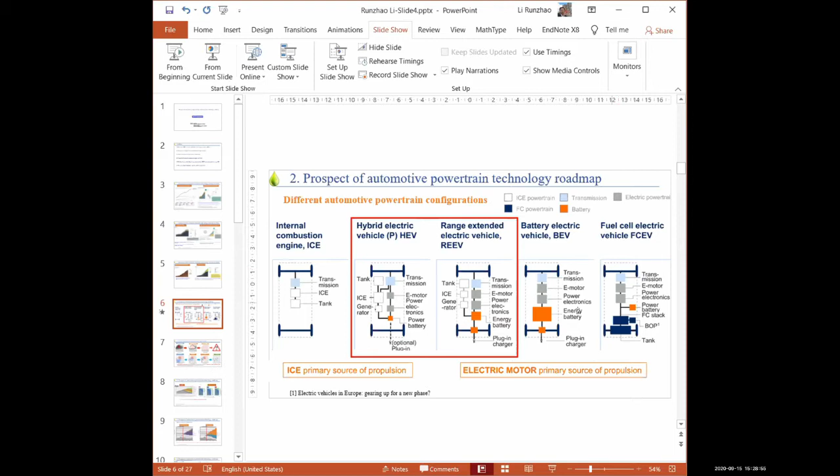Here we will discuss how hybrid technology and electric vehicles can provide a new development opportunity for the IC engine.

This is the traditional engine development procedure. But if we introduce the electric vehicle, especially the hybrid vehicle including the IC engine, it will provide a new opportunity for the IC engine to stay alive in the future. We will see that the IC engine will no longer work in the whole range. It just needs to work in this range.

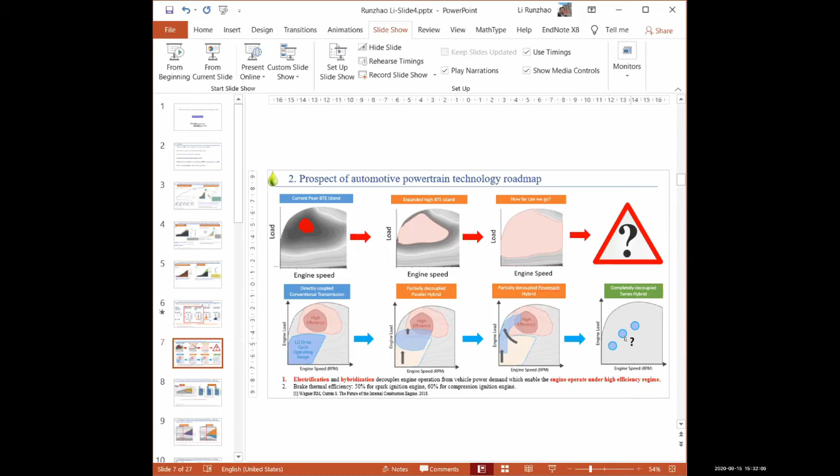Okay, this is the hybrid vehicle. We will see especially this one. This is the future. In the next 20 or 30 years, powertrain technologies like IC engines, hybrid vehicles, battery electric vehicles, or fuel cells will be diverse. The IC engine will no longer be the king of the vehicle.

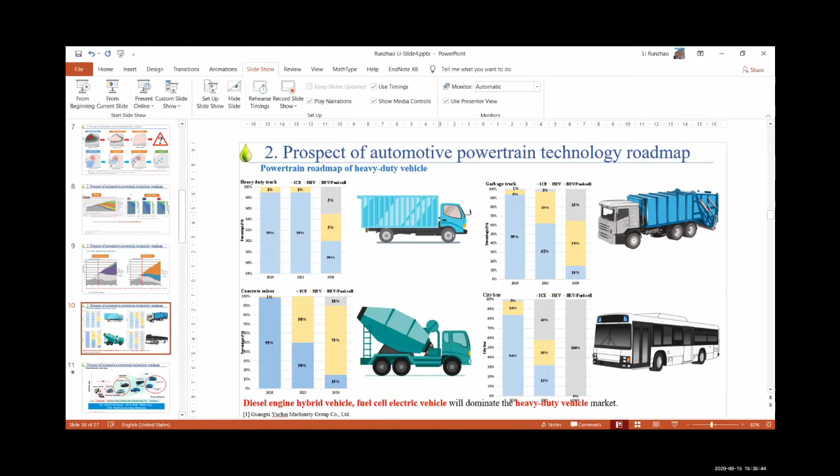Of course, for the mini vehicle, the battery electric vehicle can be used because it doesn't require a very long distance cruise. You just need to drive to the university and go back home. Therefore, the battery is enough.

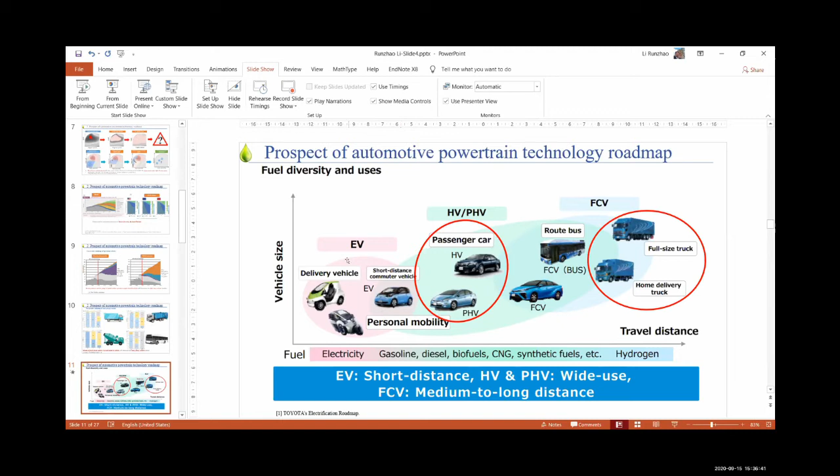Therefore, at least in my perspective, the hybrid vehicle or the plug-in hybrid vehicle will be dominant in the next 10 or 20 years, and it will also keep the IC engine alive.

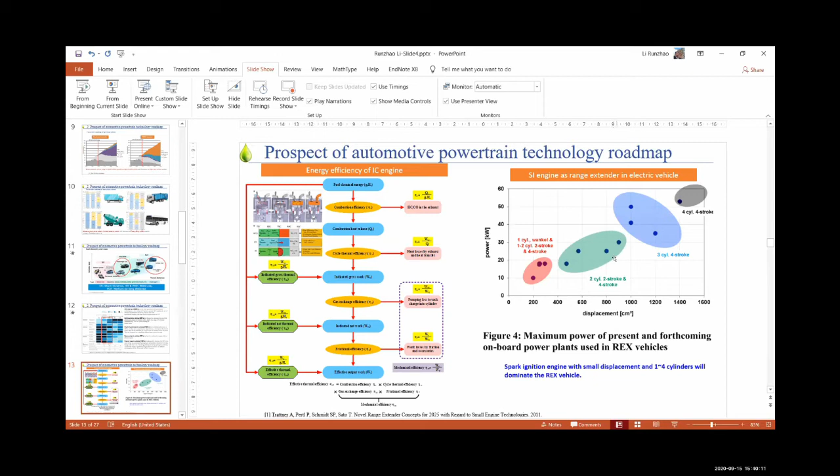We already know that, but it also uses some sustainable energy like wind energy and solar energy to produce electricity to electrolyze water to produce hydrogen. This is the reason why I say hydrogen is very, very expensive.

This hydrogen, unlike what Martin said, is in this case not used in the IC engine. It is used in the fuel cell, because in Shell's plan, the best usage of hydrogen is not in the IC engine, but to supply the energy source of the fuel cell.

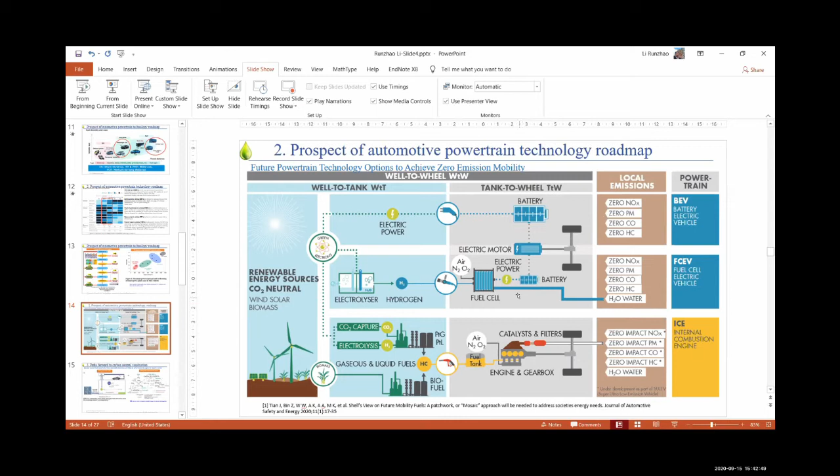Yes, but we can see here in this whole picture of the tank-to-wheel view, Shell still incorporates the IC engine into the powertrain technology. That means Shell also favors that the hybrid vehicle will dominate in the future.

For example, I already mentioned that in China, even though they transfer to the electric vehicle using the fuel cell or the battery, since in China more than 70% of the energy mix is from coal, the majority of the electricity production is from coal. Therefore, the Chinese government still encourages carbon neutral fuels, where the net production of CO2 is zero.

We take e-fuel from renewable electricity as a case study. First, use sustainable energy to produce the electricity, to electrolyze the water, to produce the hydrogen. Then they capture the CO2, carbon dioxide, in the atmosphere, and then manufacture the syngas, and then use Fischer-Tropsch technology to produce the liquid fuel.

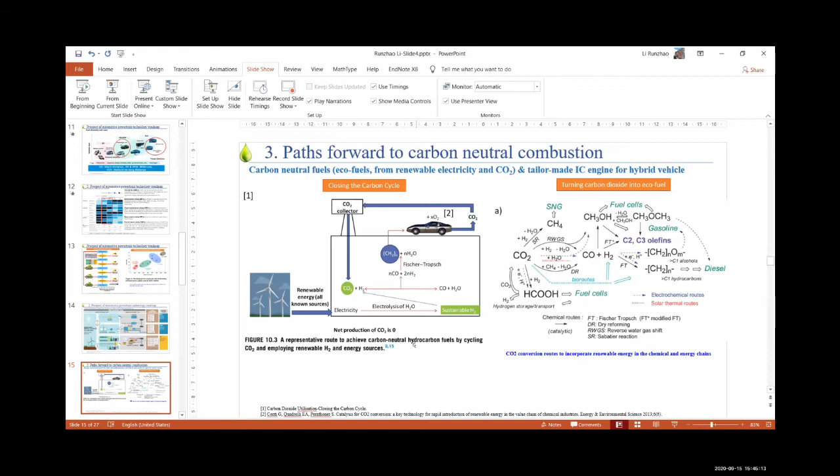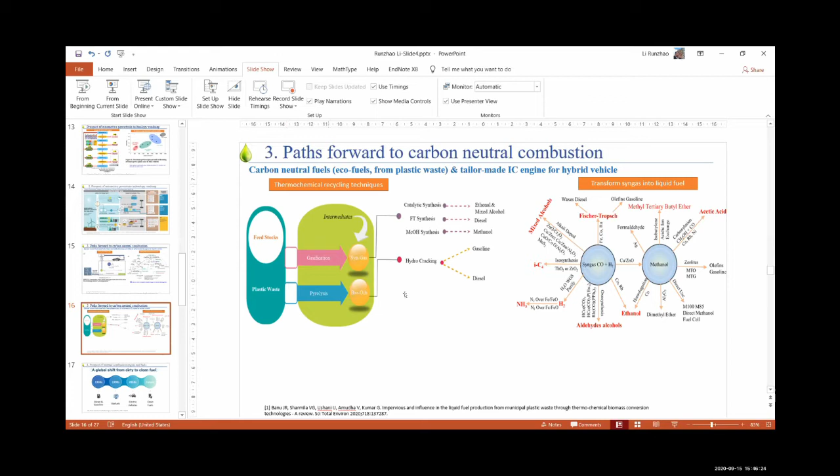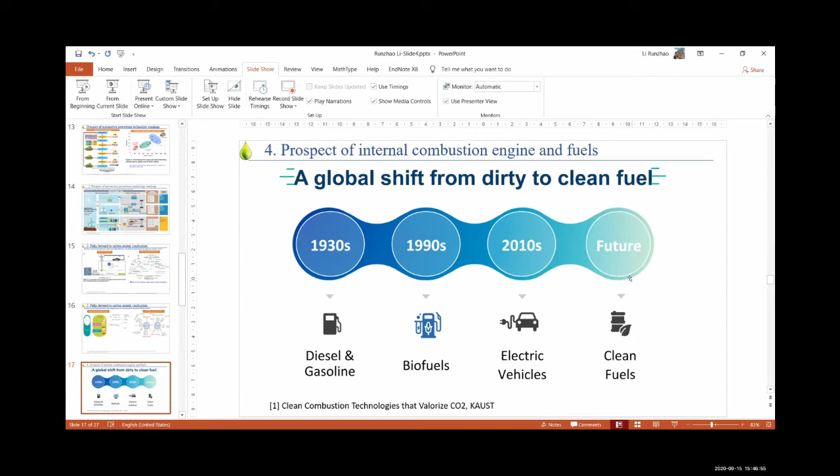This is the perspective of Saudi Aramco. It claims that the electric vehicle gained more attention in 2010, but in the future, clean fuels will play a more important role. Let's go a little bit further to see how this clean fuel will play its role.

First, we have an overview of the combustion modes of the IC engine. The first one is the gasoline engine, spark ignition combustion mode. The compression ignition mode is commonly used in the diesel engine.

Now, some new technology. The ideal is homogeneous charge compression ignition, but currently it is constrained to a very limited operating range; it cannot run in a wide range of operating conditions. Therefore, researchers developed many types of advanced combustion modes, like the reactivity controlled compression ignition combustion mode, which is shown here. Another is the gasoline compression ignition engine.

They use medium reactivity fuels, not in the spark ignition engine, but in the compression ignition engine. That type of fuel is a little bit like gasoline, but with a lower research octane number of 60 to 70. This technology doesn't need major modification of the engine, but can also obtain a very high efficiency simultaneously. This is the different stratification of the engine, but I don't want to go further in this slide.

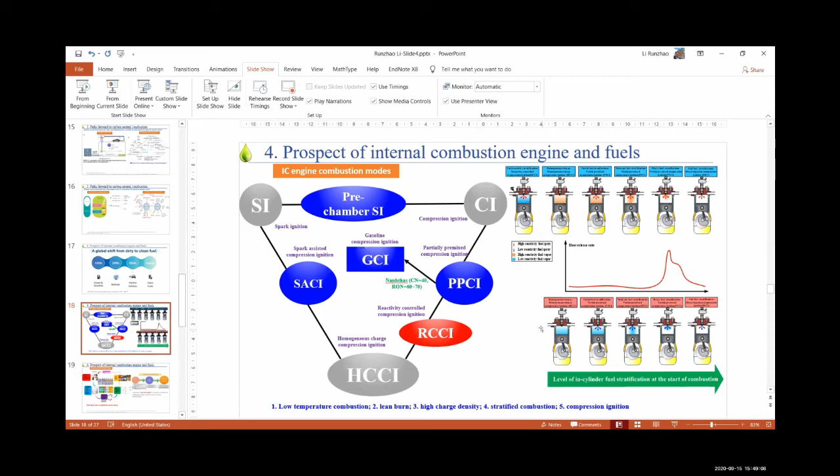Since we already have our target, the GCI mode, the gasoline compression ignition combustion, what is the best fuel for that combustion mode? How can we formulate the fuel components? Traditionally, it is the petroleum, the synthetic fuel of gasoline or diesel in the market; we purchase from the market and then we run it in the engine and get our performance: the fuel consumption, the thermal efficiency, the power, the horsepower output.

But in the future, since we already have an advanced combustion concept like the GCI combustion mode, we are not satisfied with the current gasoline and diesel the petroleum companies provide. Therefore, researchers developed the property-oriented fuel design. It is based on what the GCI combustion mode needs for the fuel properties, for example the cetane number, the octane number, the surface tension, viscosity, and so on.

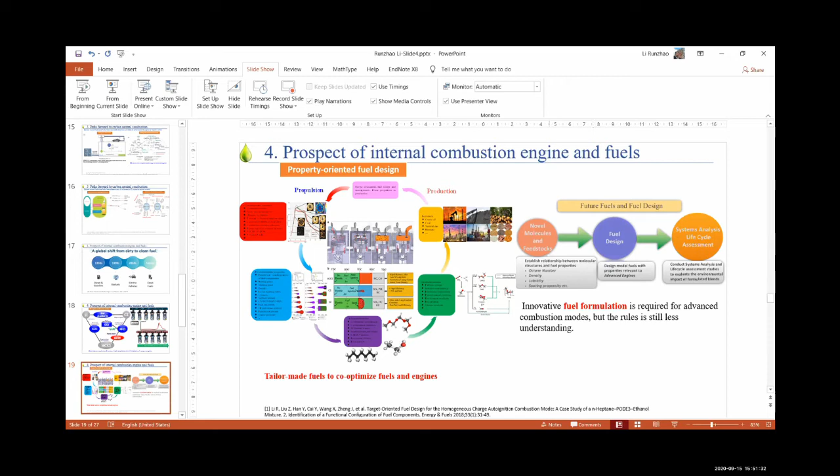This is some automatic technology we can use to formulate the fuel. The first one is to generate molecular structures to build our fuel database. For example, if you want to build a database from methane to hexadecane, C16, you cannot list the molecule candidates manually. Therefore, you can use a molecule structure generator to generate them by computer. I think it will be more than 100,000 molecules from C1 to C16.

In our research group, we developed a high throughput fuel screening tool. Once you establish a fuel compounds database, we use machine learning to predict the fuel properties of these fuel candidates, and then we use the fuel screening process with different parameters like research octane number, cetane number, ignitability, viscosity, and other physical and chemical properties to obtain the target fuel, and then we can send this fuel to the fuel production company.

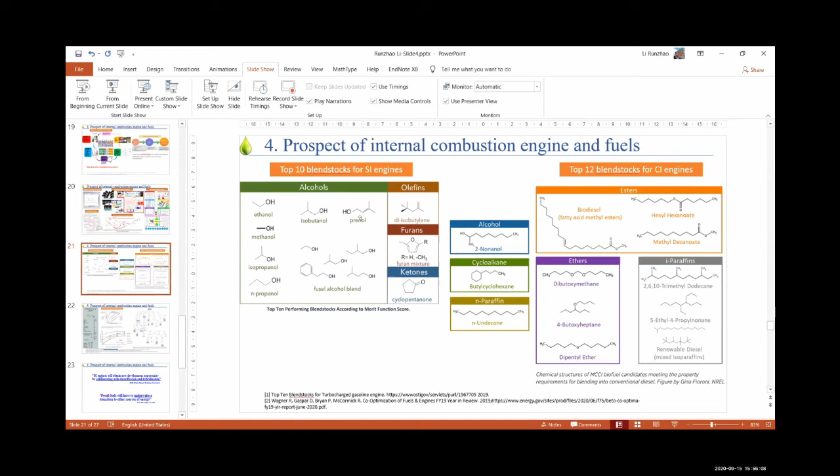And you see here they propose prenol, one type of alcohol. There is a very interesting phenomenon. The gasoline we sell in the market is usually number 92, 95, and 98 octane number. But here, if we blend an additive to increase the octane number of a base fuel, say the additive has an octane number of 110,

if we add it into the base gasoline, there are usually three types of possibility. The first one is that as the additive is added, the octane number increases linearly. Another is a negative effect, where you even get a worse octane number. This is the antagonistic blending effect, because compared to linear blending, it is still worse than that one.

The ideal one we investigate: compared to the 95 gasoline, the 98 gasoline will have more iso-octane component in that composition. It will also introduce the synergistic blending impact. That means if this is 100% of the octane number and this is 100% of the base gasoline, when you're increasing the octane number proportion, finally, in the ideal condition, what you can obtain is the octane number of 100; you never exceed that octane number.

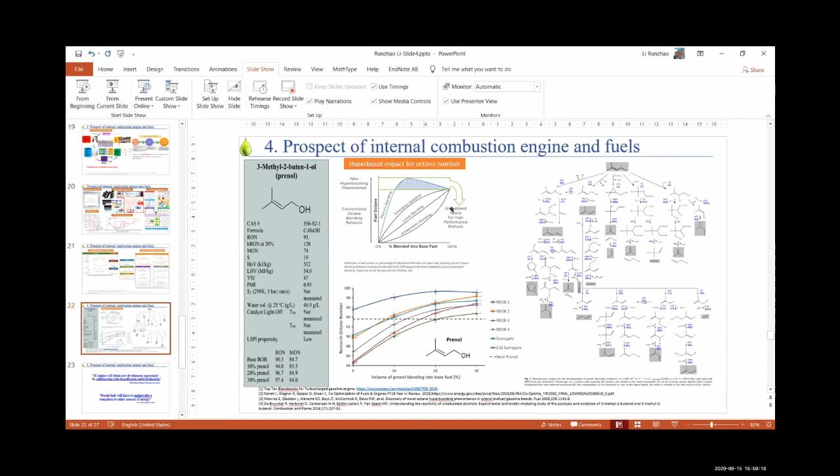And for the concluding remark on the prospect of internal combustion engines and fuel: I cannot say whether the IC engine will die in the next 10 or 30 years, but I can say that if it doesn't collaborate with the hybrid vehicle, it must die. But if we can embrace this opportunity with the hybrid vehicle, it will be alive in the future, because it will get a new development opportunity. As we discussed previously, the IC engine will no longer run across the full engine map. It just needs to run at a single point or a few single points.

And for the fuel aspect, the raw sentence is that fossil fuel will have to undergo a transition to other sources of energy. That means the fuel completes a transition from fossil fuel to sustainable fuel, for example fuels from biomass, from waste plastic, or from sustainable energy, like electrolyzing water to produce hydrogen and combining it with CO2 to produce liquid fuel. This will convert from fossil fuel to carbon neutral fuels. This is the trend in the future.

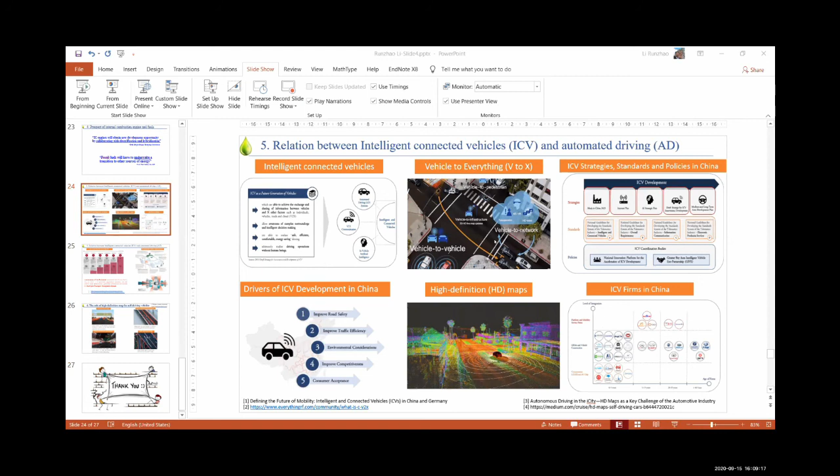But we can see that for the intelligent connected vehicle, what is the core? It is to obtain information. Therefore, all the information obtained from the automated or self-driving vehicle will eventually be sent to the center of the intelligent transportation management system, and then fed back to other vehicles or individuals. This is why I think autonomous driving will finally be connected into the intelligent transportation system. In the future, it will be a big data future.

In addition to self-driving, another very important technology is the high definition map - it is necessary for self-driving. Its first function is to extend the sensor range. For example, the vehicle sensor is very limited, maybe only 20 meters away.

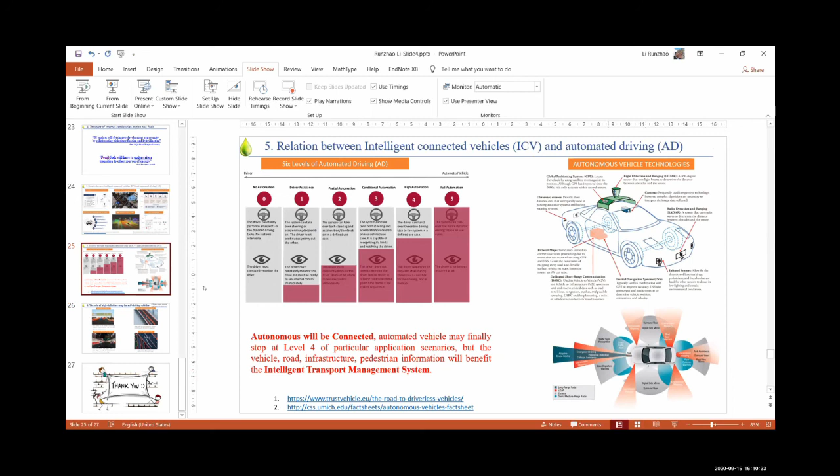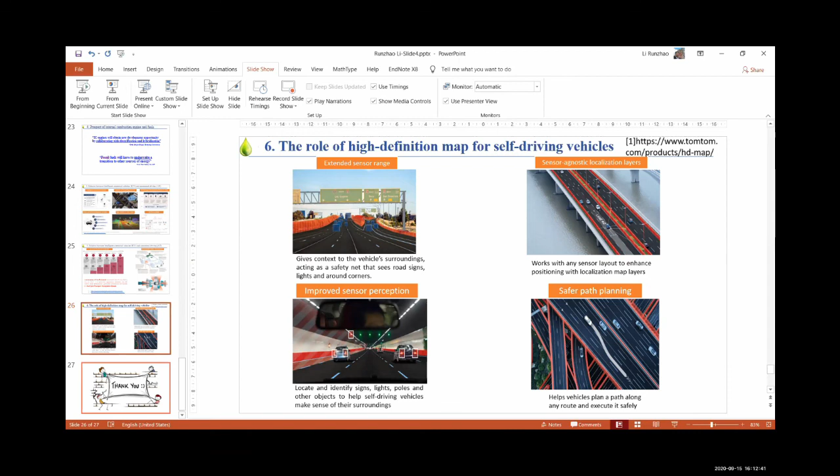Yes, I saw a question from Stephanie. When do you think the majority will be... I think level 5 is not very possible.